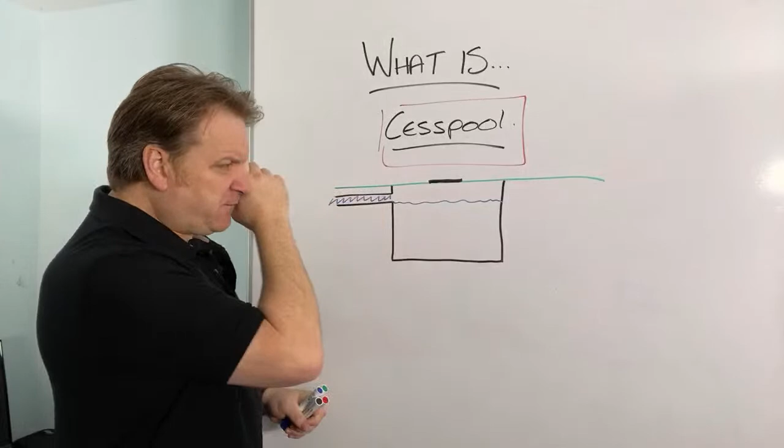go anywhere. What do I mean? Well, it can't leak out. This is a sealed unit, and all it can do is back up. Once it's full, it's got nowhere else to go. I suppose it can rise up to the top here, so if I put a little lid on there, the water can rise. But cesspools are sealed containers, so they're deemed quite safe, because once they're full up, you've got to stop putting any more liquid into it.

And then you get the septic tank emptying man out, or some kind of waste carrier. They'll suck the liquid out of the tank, and then the process will start all over again. Now, cesspools are a thing of the past, and whilst they have their place, they're good in certain scenarios, for holding on to toxic waste and stuff, so they're a lot less of a pollution risk, because it's contained.

In modern living, you don't normally see cesspools in properties now, because imagine connected to this cesspool was a 3, 4, 5, 6, 7 bedroomed house. With the amount of liquid those people produce every day, it's going to take about 24 hours to fill up before you've got to get it emptied again. If it costs you £200 a time to get it emptied every day, every 2 days, you're going to be paying out £1,000 a week just to get your cesspool emptied.

So they're good in certain instances, if you're dog kennels or on an allotment and you haven't got the space to put a soakaway in, and there's only one person flushing one loo, then it's going to take a lot longer to fill up. Depending on the size of the cesspool, it may take a month. So £200 a month is better than not having any toilet facilities at all. So that's what a cesspool is. It's only got an inlet and it's a sealed unit.

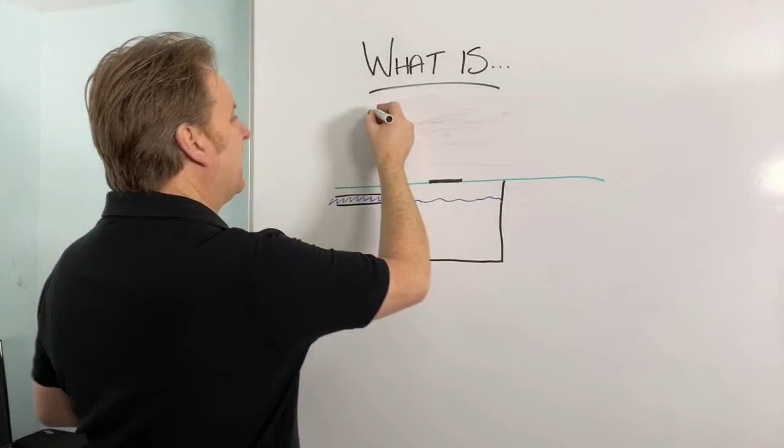So next one then. That's what is a cesspool. The next one I'm going to answer is, what is a septic tank?

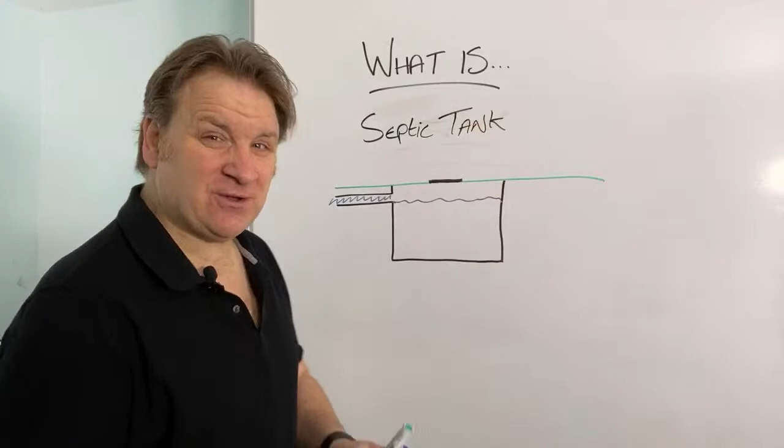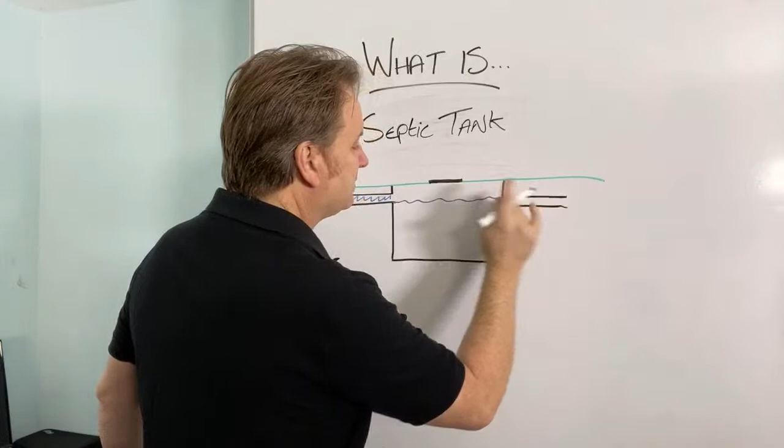So what's a septic tank? That's a good question. Okay, lots of people ask me what a septic tank is. Well, a septic tank differs in this way. You not only have got an inlet, but you've also got an outlet. All right? So you've got an inlet and you've got an outlet. And what that means is this.

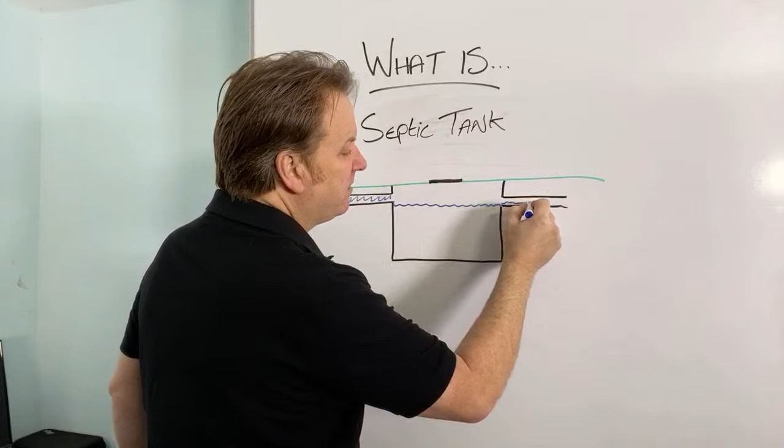So all the wastewater will come into the septic tank. The septic tank level will reach the height of the outlet pipe, and from there the liquid will then make its way down through the outlet pipe into a soakaway. So in this instance I'm just going to do a little pit like that, okay?

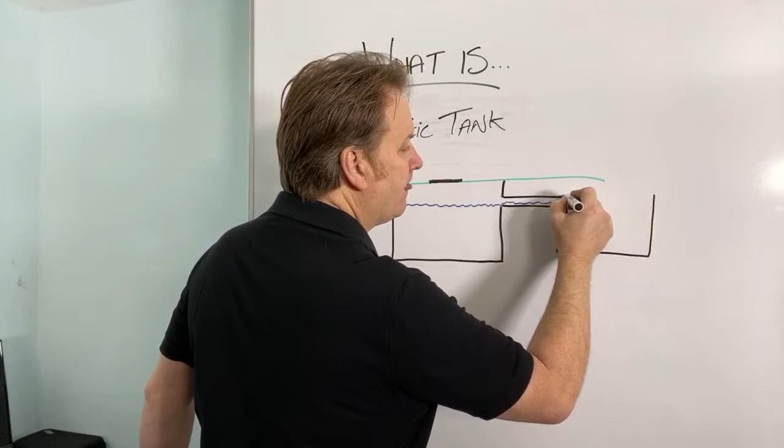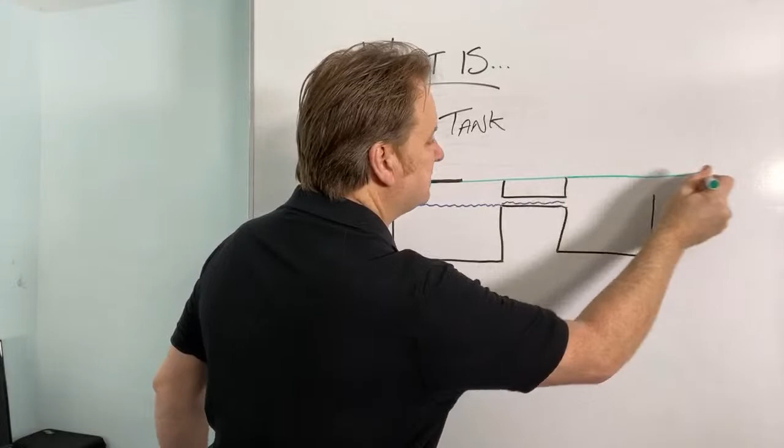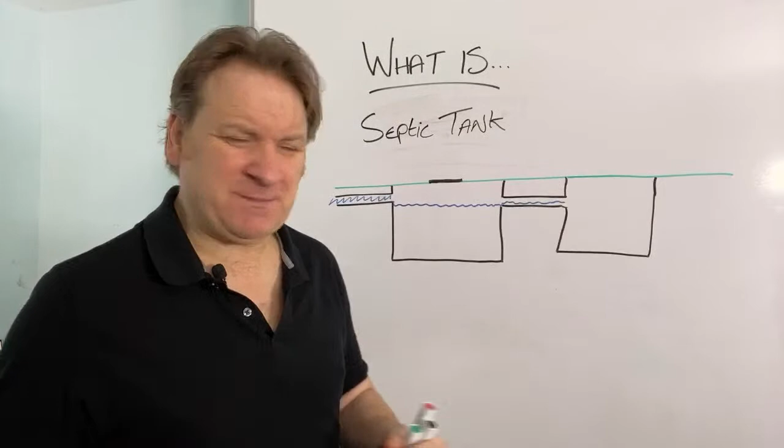So I'll talk a bit more about soakaways in a minute, but a soakaway, how much room have I got on the end there? All right, so let's just do this. So that's the continuation of the grass. Let me just put that line down there. All right, so a soakaway is just basically a hole in the ground or some kind of product in which the liquid from the septic tank can go into, and then it'll just soak away into the soil. So that's what a soakaway is.

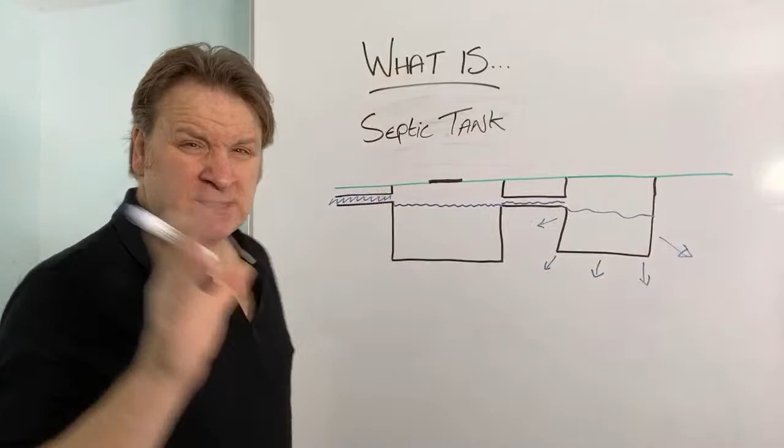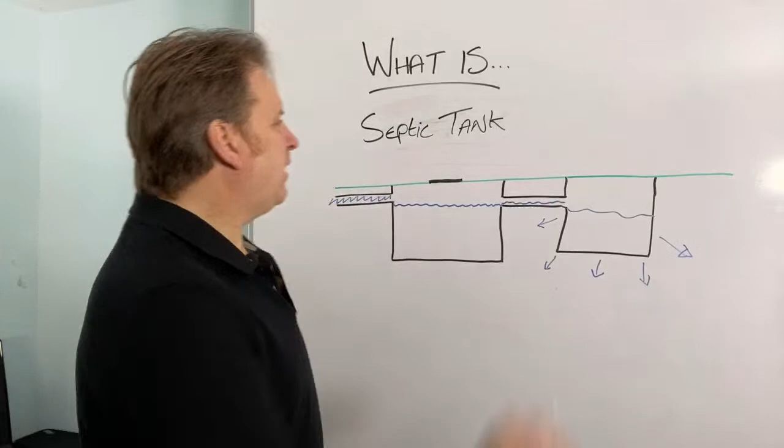But just coming back to the septic tank for a moment. So the septic tank is different than a cesspool because it's got an outlet as well as an inlet. All right, so now, next question. What is a sewage treatment plant? All right. I suppose all this can get quite confusing, but I'm going to try and keep it really, really simple.

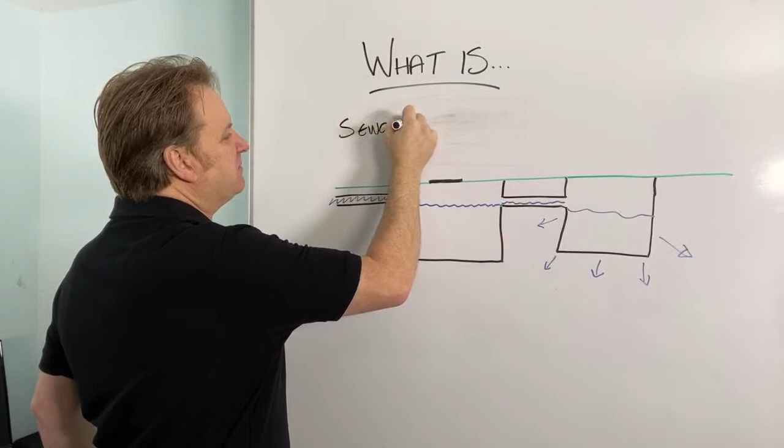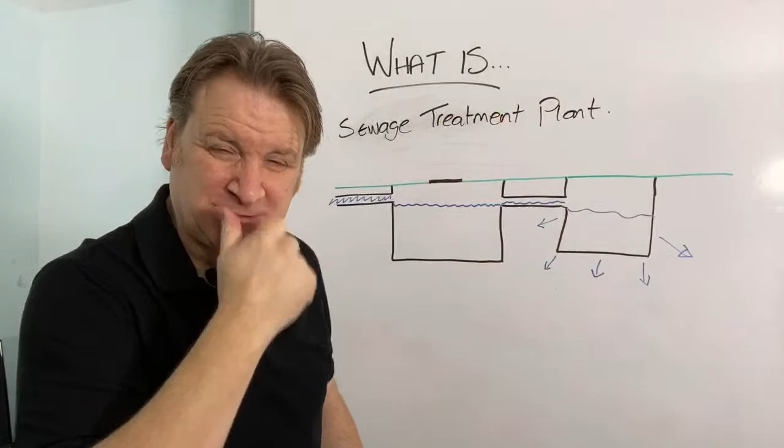So what is a sewage treatment plant? Now, a sewage treatment plant, if you go to the edge of a city or a town or whatever, you'll see these massive circular concrete rings with like rods on that go around, and it stinks when you go past. That's a massive sewage treatment plant, right? But a domestic one for me and for you living at home, this is what I'm talking about here. So what is a domestic treatment plant?

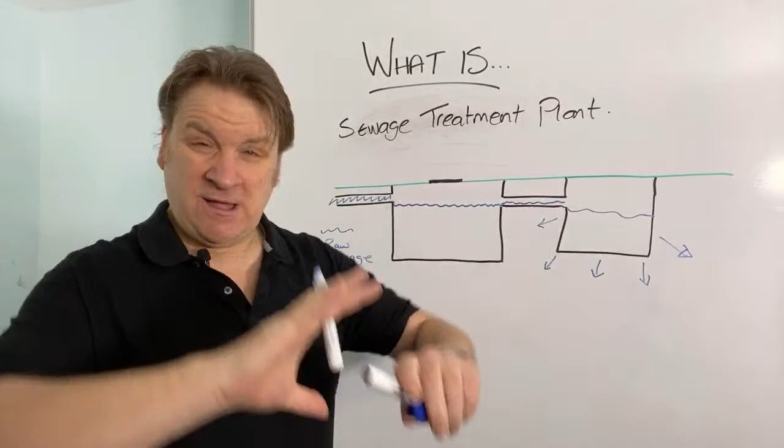All right, well, with a cesspool and a septic tank, in here, all this is raw sewage, right? So if I put that, that equals raw sewage. All right, so you got raw sewage going in, and you got raw sewage going into your soakaway, and you got raw sewage going into the soil. As it travels through the soil, that sewage is treated.

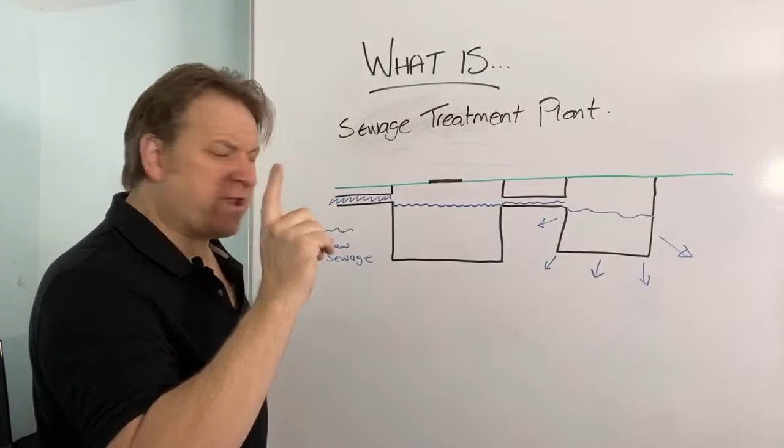Now, with a treatment plant, right? With a treatment plant, this is what the difference is. It still looks exactly the same as a septic tank, but, right? It's got electrics to it, right? So it's got power. So if I put here a power supply.

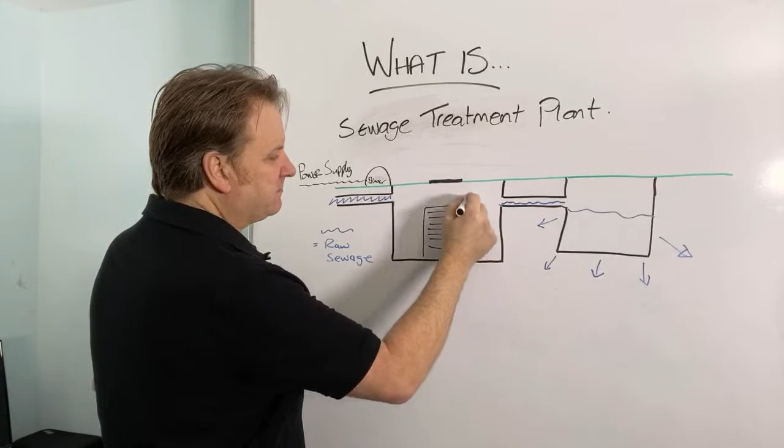And inside you'll have like a hive. They call this like a hive. And you'll have some pipes coming up, like so. They'll probably look a bit neater than this. But the point is, you'll have some electricity going to this hive, and it produces lots of bubbles, right? And what it does in here, you've got two compartments. You'll have one compartment here and another compartment here.

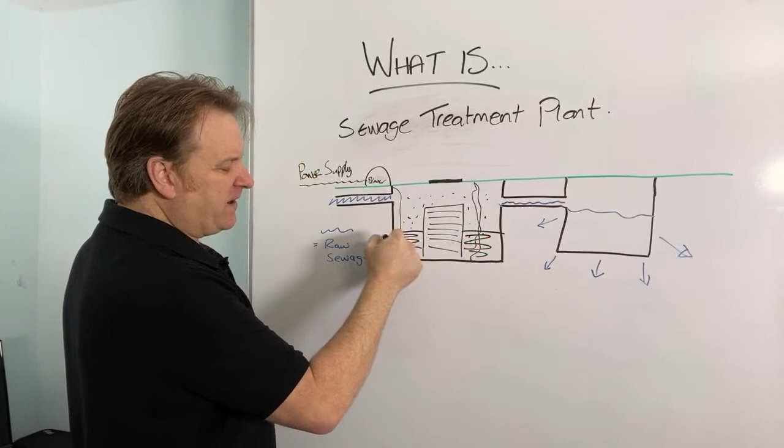So all the poo and the fat and the grease and the sludge will go into this compartment. Right, you'll get a secondary compartment where there's not as much poo and fat and grease in there. But the point is, it works like an aquarium. You know, like an aquarium, right? See all those bubbles and stuff bubbling around, and it oxygenates the water.

Same happens here. This blower is like a big aquarium, so it oxygenates all the water in there and cleans it. So you've got raw sewage going in, but you've got clean water going out. All right. So that's the difference between a sewage treatment plant and a septic tank.

Now, as you can see, right, there's a lot more moving parts here. You've got compressors, you've got motors, you've got cogs, you've got bearings, you've got pulleys, you've got shafts, you've got loads and loads of things to go wrong. And what I find is nuts about this, right, is the fact that electric and water just don't mix. Motors and compressors and bearings, they just don't mix in water.

So typically a sewage treatment plant will only have a lifespan, something like, I don't know, man, they only come with a 12 months warranty, right?

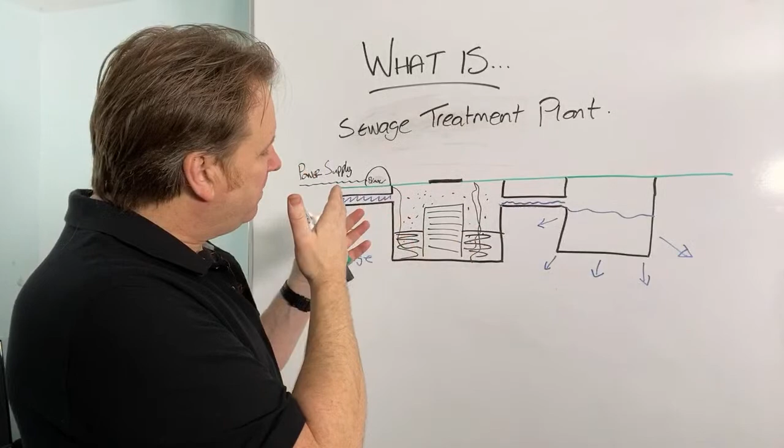So I don't want to demonize a sewage treatment plant, but they only come with a 12 months warranty. So that tells you something, right? And unless you get them serviced every year by an approved contractor, then the warranty is null and void. But anyway, listen, I digress. So that's what a sewage treatment plant is.

All right, so now let me just show you one more thing here. Right, so let's just wipe all that out. So one more thing to show you. So what is a soakaway? Well, I've explained what a septic tank and a cesspool and a sewage treatment plant is. Right, now if I just do it here, so this pipe coming in from here, that is from the septic tank. Let's just keep it really simple, right? Okay, so a soakaway, let's just put some water coming down this pipe as well.

Well, a soakaway does exactly what it says on the tin. It can either be known as a soakaway, a drainage field, a leach field, whatever, right? And so there's different types of soakaway. Right, so up until about the 1960s, everything was just a pit in the ground. And this pit would contain bricks, it would contain bicycles, it would contain builders' rubbish, all kinds of stuff. But the point is, the water would come in from the septic tank.

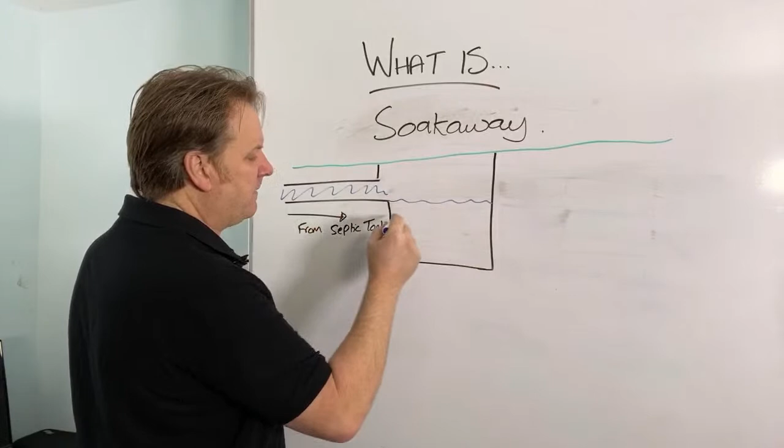It could be filled with gravel or shingle as well. It would come in and it would fill up to here, right? And this pit would be filled with loads and loads of gravel like that. The water would sink into the gravel. And as I said, it would basically then just soak away into the soil.

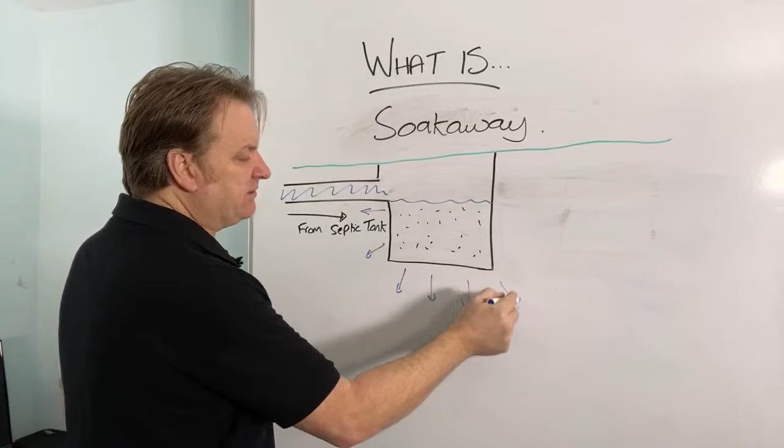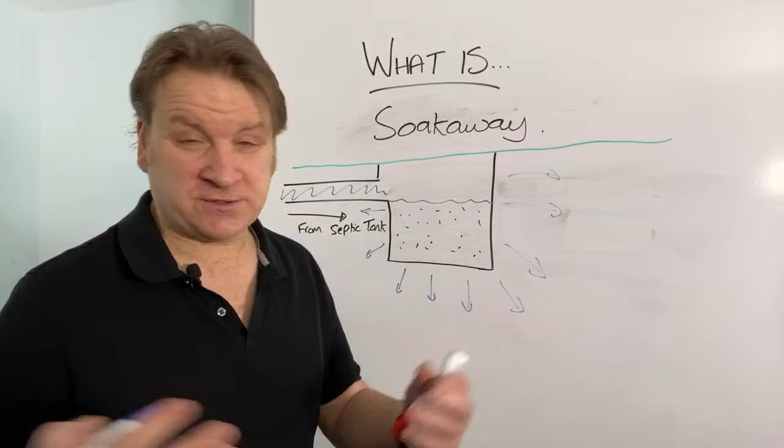Now, the size of the soakaway will depend on the number of people using the septic tank. So obviously the soakaway is going to be smaller if you've got 2 people using it. If you've got 10 people going into it, then obviously it's going to be a lot bigger. And also the size of the soakaway will depend on what the soil conditions are around it.

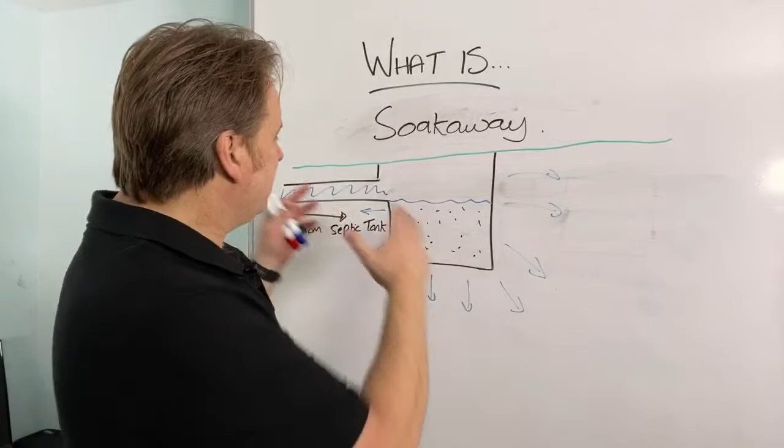So for example, if you live in an area where there's chalk or sand, then the water's going to come straight in and soak straight away again. Sand and chalk are the best soakaway mediums you can get. If it's surrounded by clay, then the soakaway has to be a lot bigger. And for that reason, I'm going to show you a different type of soakaway design now, right?

Now this is called a herringbone system, what I'm about to show you. And basically a herringbone system looks like a fishbone, right? It's called a herringbone because that's exactly what it looks like. It looks like a big fishbone. So if we look at it side on, a herringbone system consists of lots of pipes with holes in, perforated pipe.

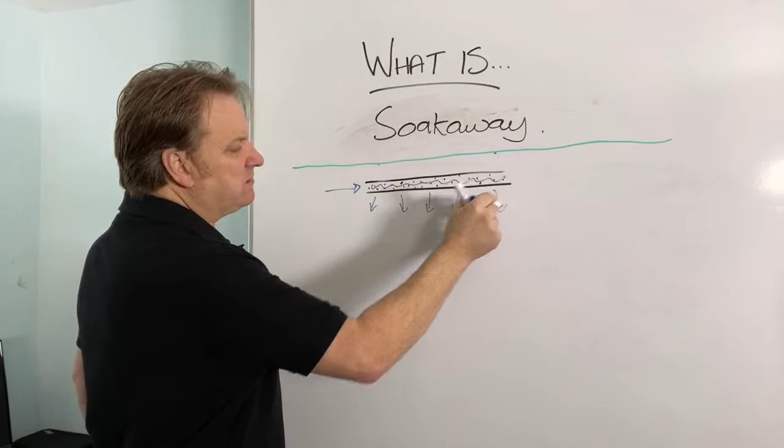The water from the septic tank, there's no pit as such. The water just comes from the septic tank into here and goes into the herringbone pipe, and then from there it soaks into the soil. Now, if I was looking down as an aerial view, okay, so that's side on. If we're looking down now, like a 30,000 foot view, from the top it would look something like this. Okay, so you can see why they call it a fishbone now, can't you?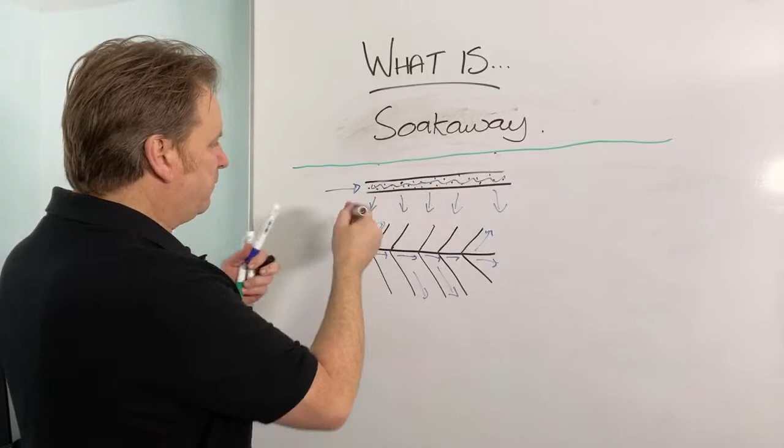So that's looking down. So from here, that comes from the septic tank there. And so the water travels along through the perforated pipe there, and then it makes its way out through the branches here into the soil, and then just drains away into the soil. And if you imagine this is a side view, below this there will be a bed of shingle on which the soakaway pipes sit.

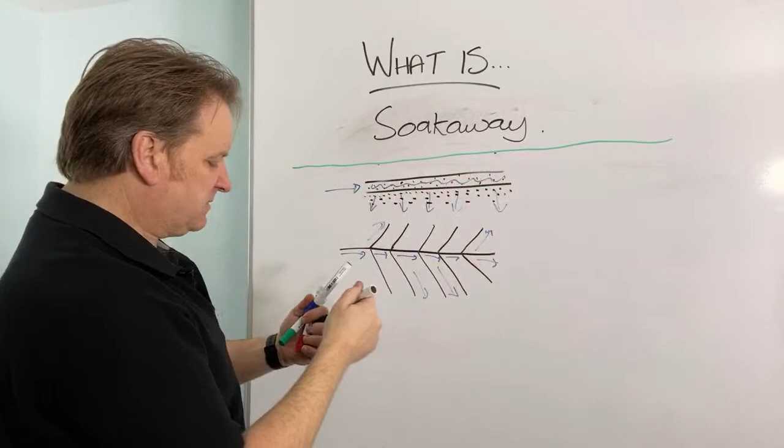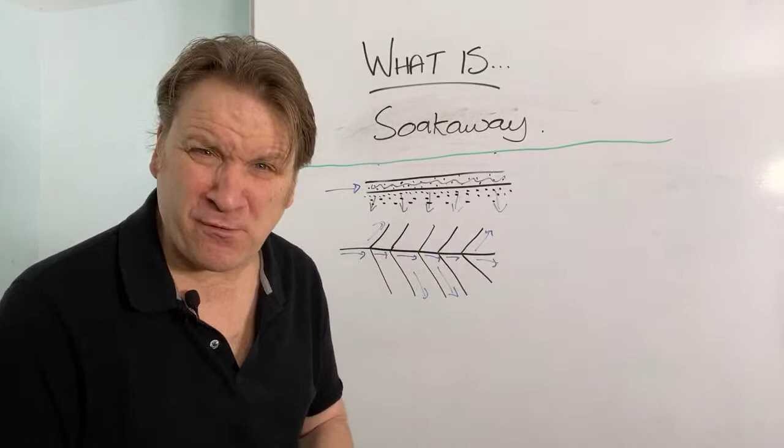So the water comes out of the pipe, it's got no resistance, the soil is about here, or clay or whatever you've got, so it can actually leave the pipe, soak into the gravel bed, and then soak into the soil. So a soakaway herringbone system is a lot bigger than a soakaway pit. I mean, you can get herringbone systems that cover the size of a flipping football field. It's nuts, I know, but nevertheless, that's what a soakaway is, okay?

And so one last soakaway I'm going to show you. Now this is, oh, I'm running out. Hold on, excuse me a sec.

Do you know what? The best thing I found for rubbing the pen off a whiteboard is kitchen roll. I've used all kinds of board rubbers and stuff like that, but kitchen roll, if you've got a whiteboard and you want to get rid of the pen off the board, kitchen roll is the best thing to use.

All right, so one last thing I want to show you, which is very, very popular. For me, this is the best type of soakaway product. All right, let me show you. They're called septic tank soakaway crates. Septic tank soakaway crates. Let me show you this, right? So again, that's your pipe coming in to your soakaway, right? So you've got your water coming in here, okay, from your septic tank.

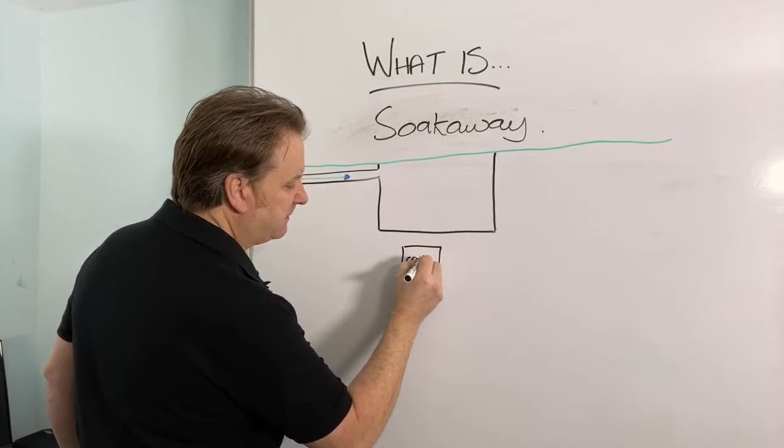Now a soakaway crate looks like a milk crate, all right? So if I just show you here, it looks something like that, right? And they call them septic tank soakaway crates. And what happens is this: if you imagine this is a hole, right? Well, it is a hole, but the point is, at the moment, as it stands, that's 100% cavity, all right?

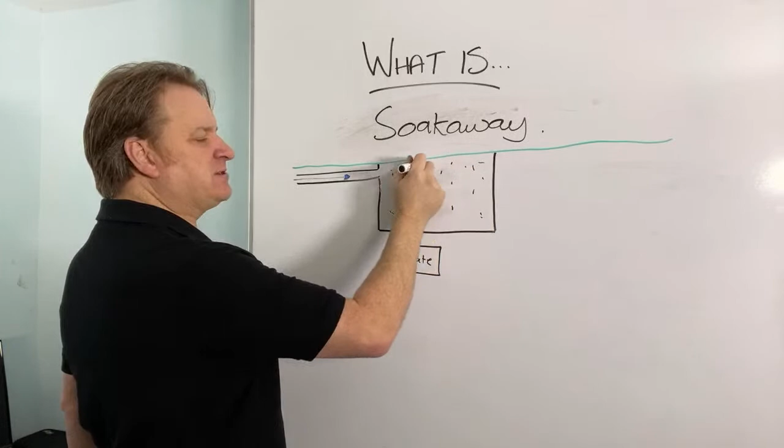And what's interesting is, if you fill that cavity up with gravel, instead of having 100% cavity, so you imagine you fill that whole hole up with gravel or sand or bricks or rubble or whatever, suddenly it's not 100% cavity anymore. Because you've just filled the hole back in, you go from 100% cavity or space to literally about 15% cavity.

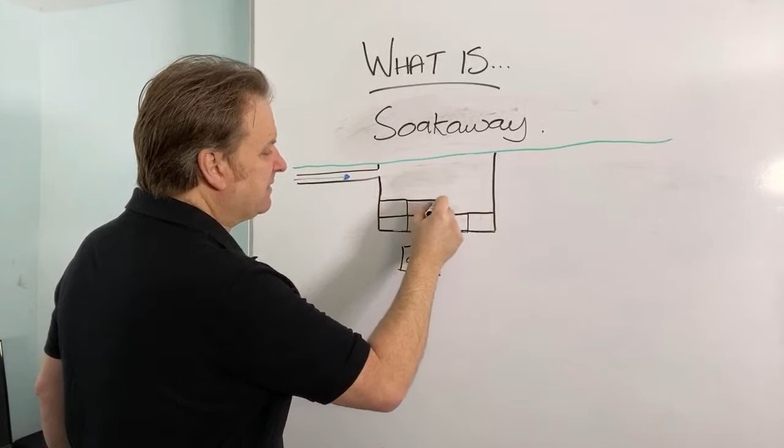So why am I telling you this? Because septic tank crates go into the pit. So let's say that's your pit here. This is how they would look from the side on. So the septic tank crates go into the pit. And because they're hollow, they've been designed by a German scientist, very, very clever. Because they're hollow, the water can still enter the soakaway pit, but it fills each of the crates up. So you retain 95% of your original cavity, right?

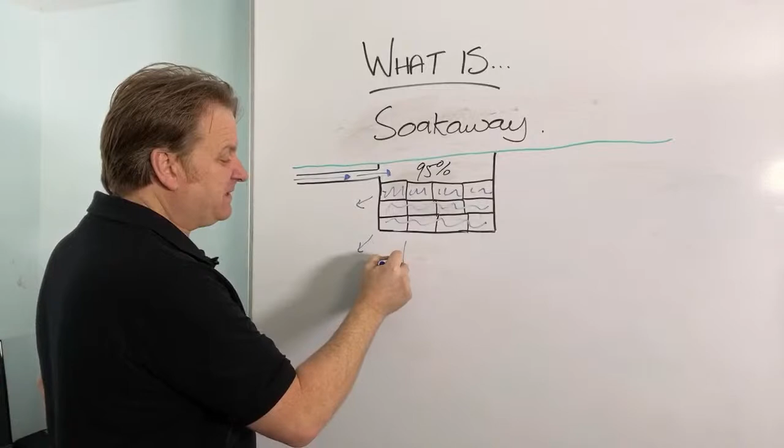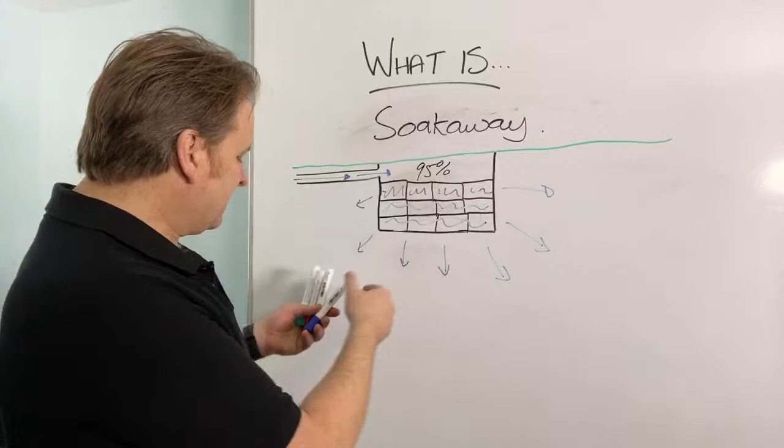But the soakaways are created in such a way that they allow the liquid to just soak away into the soil. So personally, these are my favorite form of soakaway. They're, I suppose, the latest technology. They're designed in the space age, during the space race, and they're just fantastic. They take about 40 minutes or an hour to put in. But yeah, septic tank soakaway crates, there you go.

So those are basically the different types of sewage systems you can get. You can get a cesspool, remember, it's a sealed unit. You can get a septic tank, which has got an inlet and an outlet pipe. You've got a sewage treatment plant that turns all your horrible stinky sewage into clean water. You've got soakaway pits. You've got soakaway pipes. You've got herringbone systems, and you've got soakaway crates. So that is basically the whole spectrum of off-mains sewage systems, how they work, and the different products you can use.

Oh, man alive, where's it all going? Sorry about this. My board rubbers keep disappearing.

So there you go. So I hope that's helped you today to understand a bit more about the world of septic tanks and the world that I live in and deal in.